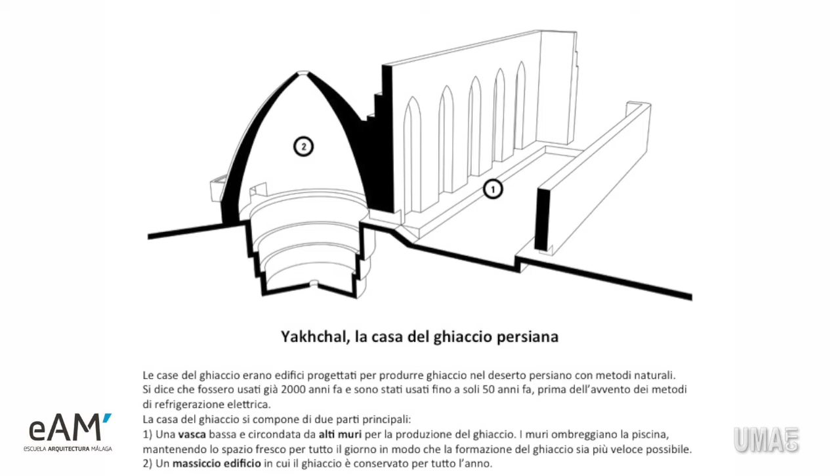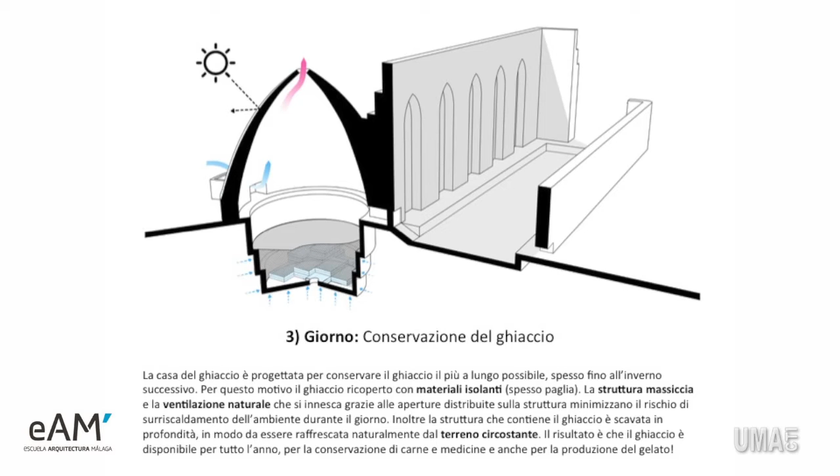Yakhchal is a house of ice. In many countries there was this idea of conservation of water, conservation of ice. They built a big wall looking south, and the wall protected a little pool behind it. In front of the wall there was a big tank with a dome. What the Persian people did was put water in this pool at night. During the day, the pool was under shade because the solar angle in winter is lower. Because the sky is minus 50-55 degrees, due to the radiation effect of the sky, the water froze at night. Every night in winter, Persian people were able to make layers of ice, then put the ice in the tank, cover it with straw, and conserve this ice all summer. So the people lived in a very extreme climate.

They were able to make this called faloodeh. It's an ice cream with tamarind and pistachio in the middle of the desert. If you read the story, Persian people were able to make ice 400 years before Christ. So it's a long, long tradition.

And this tradition I like to call empiric innovation. They try for centuries to make things until they find a solution, without any technology, only with the empirical. I try, and I'm doing, and try. So for me, this is beautiful.

I'm not nostalgic of the past, of course. I'm looking for the future, to make more buildings and new innovation. But I think sometimes it's also important to rebuild this bridge with the knowledge. Not that we want to make buildings as before, but the knowledge. We have 2,000 years of knowledge on how to deal with climate. We know, so I think it's a good time to use it again.

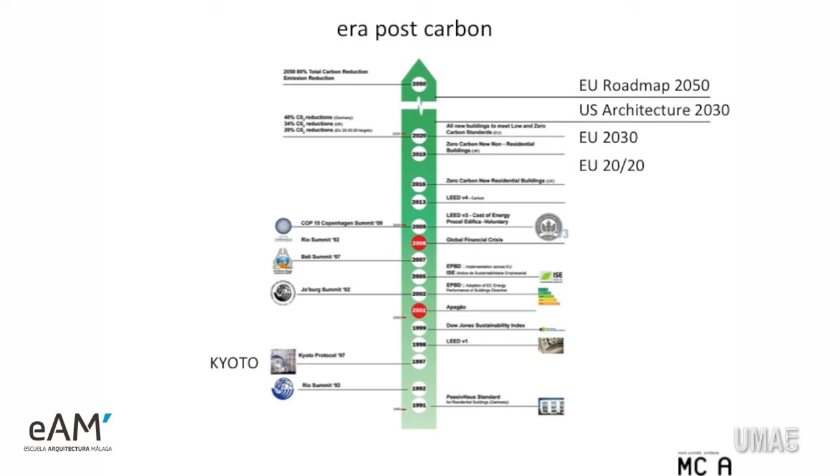As you know, 50% of all energy produced is consumed by buildings. So if we don't work on buildings, we're not going to solve the problem. That's why I think architecture, architects, engineers, and this whole idea of sustainability in buildings is very important. It's a key solution for the future.

And that is the European 2030 framework for climate change. It's a very ambitious plan: minus 40% of CO2 emissions, 27% renewable energy, less consumption of energy. So all these things look...

How we can design buildings called NZEB, nearly zero energy buildings. How we can design this kind of building. There will be an obligation in 2019 for public buildings, and it should be compulsory for all the market in 2020. So this opens a scenario I think is completely different in terms of knowledge. Are our architects ready for this challenge?

That's the point, because this is not only a question of creativity. This is how you can match tools, knowledge, and creativity. So this will be not an easy task in such a short time. But of course, it's not only a CO2 problem - that would be too easy.

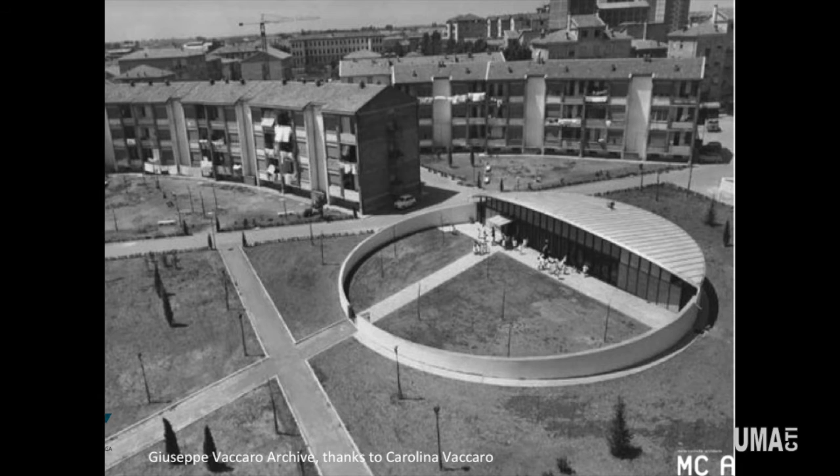I fully remember this wall, which was small and embraced the children, creating a protecting space. Then there were two small classrooms with a lot of daylighting, and I still remember the day when there was too much light coming in. It was designed by a modernist architect from Bologna, well known in Rome and Naples - Giuseppe Vaccaro - who was a very young architect at that time.

This was in 1960. He designed this building in 1957, and I was in this kindergarten in 1964. So it came back in my memory, showing that buildings don't move, but they travel in the memory. They become part of your story, part of your life, part of your emotion.

Especially for schools it's very important, because in the first 3 or 4 years children start to understand the world. If you design a building where they have a relationship with it, you can create a memory. So maybe I like to think that I'm an architect because I was in a very good and nice kindergarten.

So we designed this building based on the story of Pinocchio - I think you say that in Spanish too. Pinocchio is a very dramatic story, not really funny, actually very sad. I kept this picture - I was very interested in it, reading the book. If you know the story, Pinocchio was eaten by the whale, and he and his father were lost inside it - it took them two years to find each other.

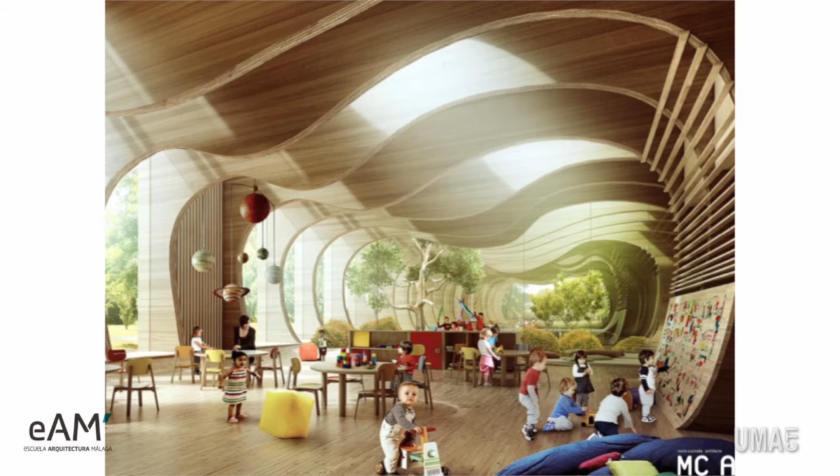If you read the piece of literature, it was fantastic. I thought, yes, this is a dramatic picture, but at the same time it looked like the womb of a mother - like being inside a belly. From this idea came our first sketches, and then we built this, which is a full wood construction building.

It's built with two materials, wood and transparent glass, and was designed in layers, one after the other, full transparent. There's no walls between classrooms, only transparent glass.

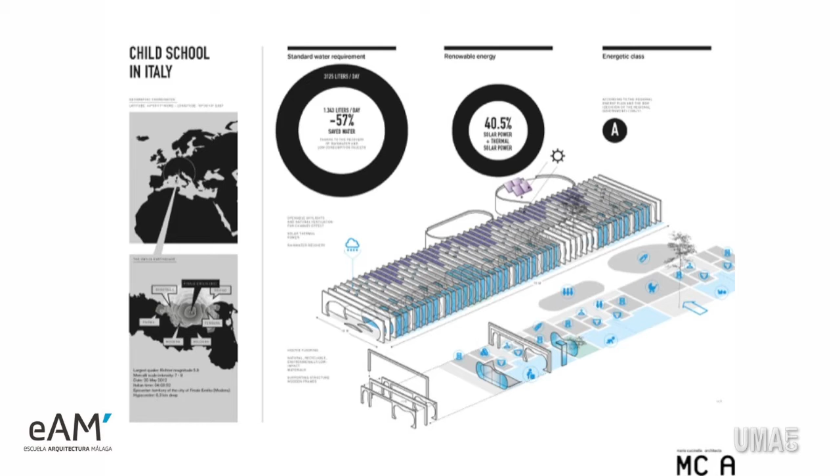Of course, it is made on the plain of Po, in the plain of Italy, between Turin and Venice. Nothing happens there, it's like a flat sea. The only things that happen are trees, very regular, and some little towers from churches. So the idea of this building was to find again this landscape of repetitive elements, very simple, something that you have in your eyes.

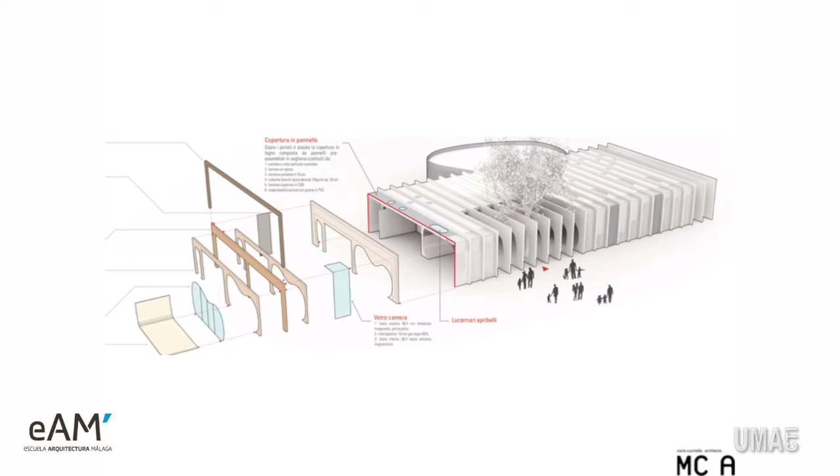And done technically by a system very simple, building this element in wood. 70% of the building is opaque and very well insulated, facing south. It's simple, also heating on the floors and a little ventilation.

Recuperation of the rainwaters, producing heating for the buildings, solar photovoltaics for the electricity. All these things are invisible. You don't see that. I think it was a little mistake in recent years to use photovoltaics as an expression.

Because photovoltaics is a very terrible piece, it looks terrible. And solar panels look like a washing machine. It's terrible putting that in the buildings. I don't think that's an aesthetic of sustainability. I like the building to be sustainable, but I don't like using that as the aesthetic of sustainability. So everything is invisible.

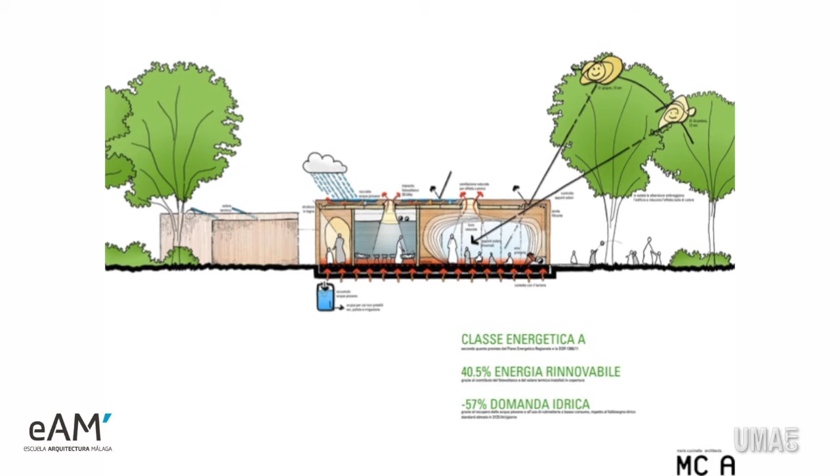What I like is the space. And of course, this diagram, which is very simple, is part of the pedagogic program of the school, teaching the kids these things, very simple. The sun is not only light but energy, the water is not only something that you can use, but you can do something else with it. So I think that's why I'm saying buildings are really the first level of education.

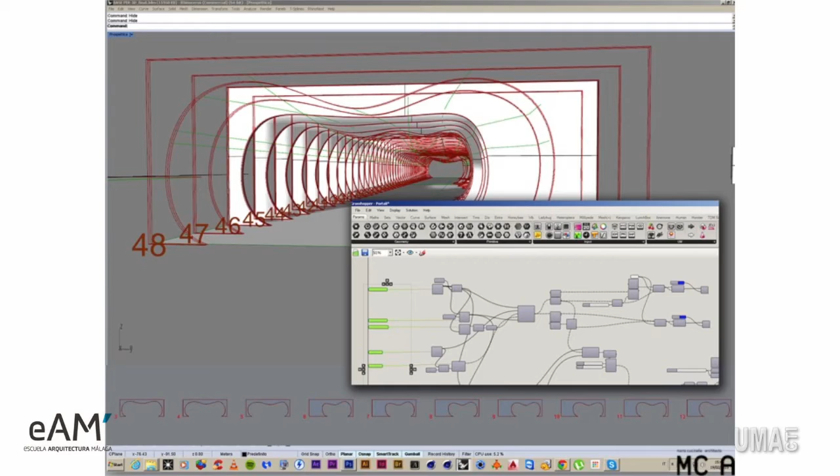We also used parametric design, and I think for us it was a very good experience designing this — in Italian it would be 'portali,' these are like doors. We sent our drawings directly to the machine at the Rubner company factory, and they cut all the pieces from the office to the machine. There's nothing in the middle. I think all these ideas of parametric design and new tools have made our life a little bit easier.

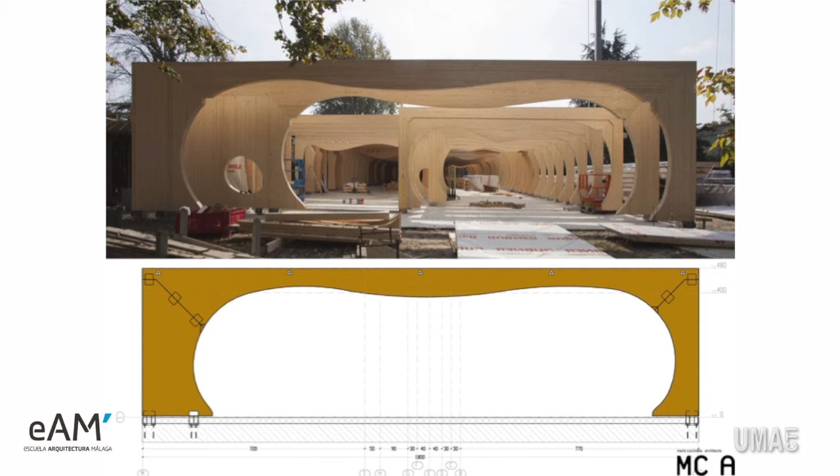And then they built 25 of these every week. In 4 weeks, all the building was up, and it took 6 months to finish. And of course, it looks like this kind of construction.

It was very important to go fast because kids need to go to school after the earthquake — if you have kids, they like the rhythm of life. If you change something in their life, it's something strange for them. So we started this project in October and finished in summertime, and next September they all went to the school. It was an event, very important for the community, and there was a long discussion with the teachers, because I always say we design schools for the others, not only for ourselves.

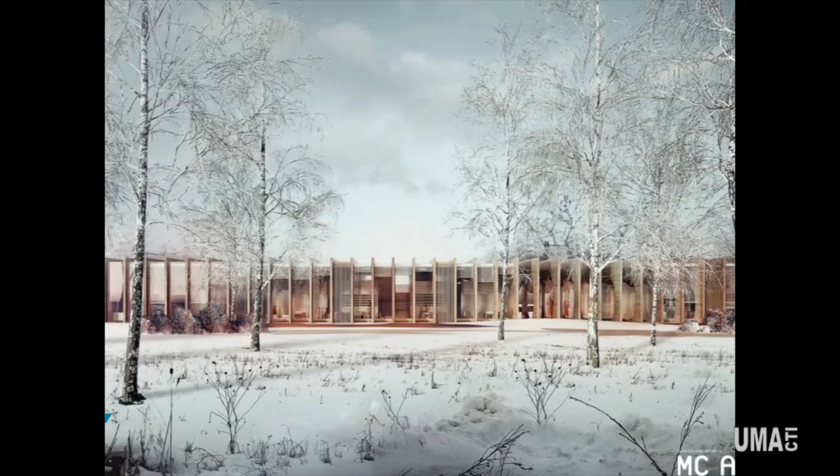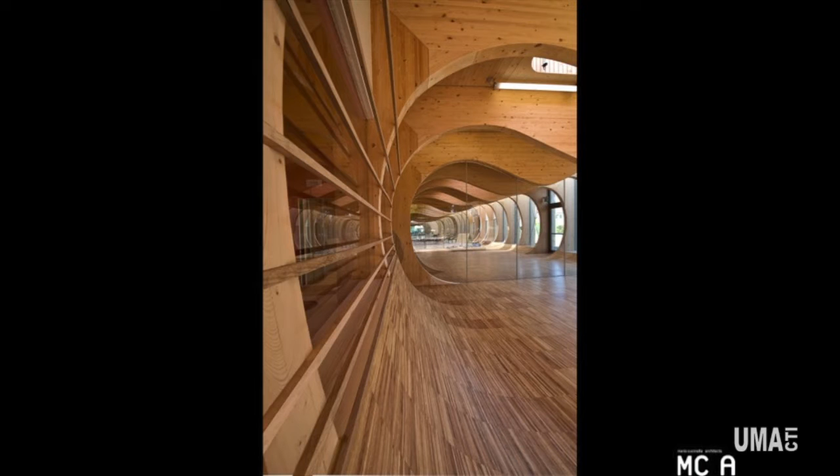And these are the pictures of the building finished. We discovered that the kids started to play with these floors, because it looks like they can play with toys and things — it was funny.

This is the laboratory, and there was teamwork with teachers and parents, because school, especially in our countries, the whole family is really attached to it — you leave your kids at school and then collect them after 8 or 10 hours.

So one point was very clear: 100% security in terms of earthquakes, and 100% security in environmental terms regarding material. Because kids touch everything, but they also lick everything, so you have to be careful about the material for them.

And then we worked with a group — we created a group of young architects called Laboratorio di Architettura Partecipata, and worked with students, families, and teachers through a series of workshops. I think it was also a way to bring the building together — when it arrived, it was already shared with everybody. I think that makes things much easier.

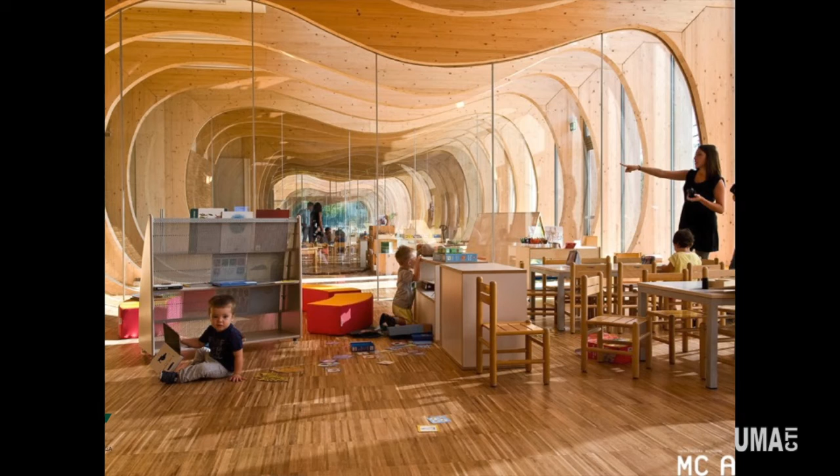And this is the project we did for ARPA, which is the Agency for the Protection and Prevention of the Environment. It's a public building, this one.

The story of this building is very long. I'm not sure if things work like this in Spain, but in Italy I won that competition in 2006, and I maybe finished this building this summer. So it took me 10 years to do it, because it was complicated and difficult, and the companies failed, so there were really complicated things. I always say in Italy, if I make one building every 10 years, and I have another 2 buildings, then my career is finished.

It's not like daylighting. Ventilation and how the air moves, all these things are complicated, so we need the tools. But for centuries they were able to ventilate whole buildings made of mud, cooling the building at night and getting back the energy collected at night during the day, reducing the temperature of the building during summertime by 8 to 10 degrees. So that knowledge is interesting.

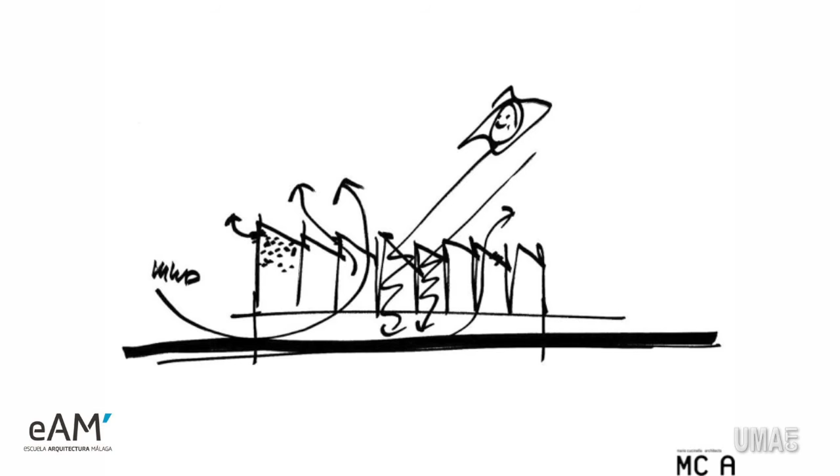When I did this project, it started with some consideration about the climate. We are close to Bologna, in a very humid and hot climate in the summer, and very humid and cold in the wintertime. So not exactly the best place in the world.

What we did is create this roof with 120 chimneys. They bring light through the building, so the whole building is in natural light, and at the same time the chimneys work with a chimney effect for ventilating the buildings.

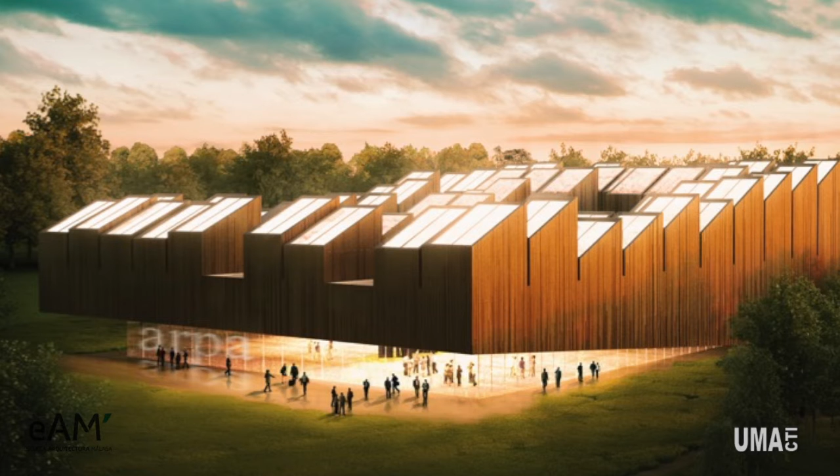So that is the diagram, showing all the chimneys and the two strategies. That's the building, all in wood construction - it takes a lot of time to design, but in reality this is a building you can build in maybe less than a year, if you want to do it quickly. And that is the passive strategies.

Of course, as a public building in Italy, you cannot do a public building only with passive strategies. You need to make all the technical services and everything. But interestingly, in the wintertime, the chimney works like a glasshouse, collecting the warm air on top, and with fans we mix the air. In the summertime it works the other way around, so when it's too hot, the chimney is opened at the back, and the chimney effect sucks air from the garden and ventilates the building.

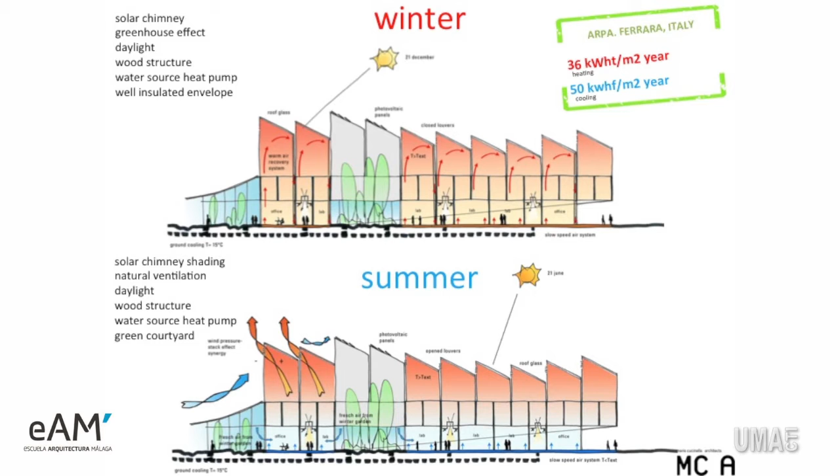Of course, that's not enough. When there's 38 degrees and 90% humidity, you don't want to open the windows, you want to keep everything out. So that works mainly in the middle season, or at the beginning of winter or the beginning of summertime. But already by the form of the building you're creating performance.

I like this connection between form and performance. And of course there are tools of analysis - this is something we do in the office. We don't do all the detail, we work with engineers, of course, but part of the office dedicates time to environmental analysis.

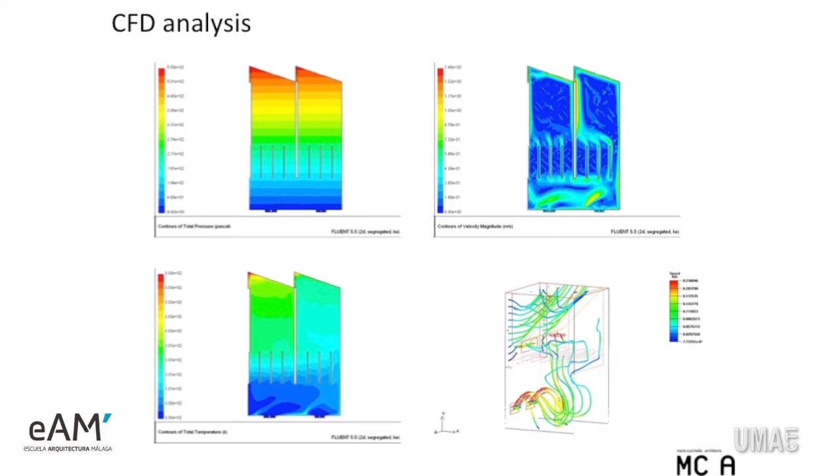So there are 2 architects who come from a PhD in sustainable design, and they do preliminary analysis on our buildings. I think it was very important for us, starting at the preliminary stage with architects dealing with this analysis. This is CFD, but we also do simplified analysis on daylighting and energy performance. So it's the beginning, but then we work, of course, with engineering, with companies, and on detailing.

But I like it when we're starting, because mistakes are made in the beginning. How you design a building - the first thing you do, if it's wrong, it's wrong. Then you can add technology, you can do something, but when it's wrong, it's wrong. So nothing - technology may solve 50% of your problems, but no more than that. That's why we work at the beginning to make some analysis to adjust the buildings, and then, of course, since we are not engineers, we work with them.

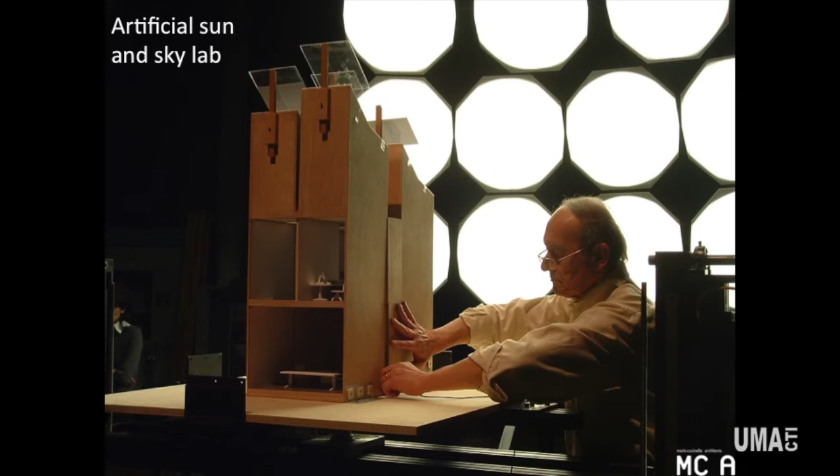That's the model in our workshop. We still do something analogic. I'm not a digital native - I'm coming from the analogic era. We do this artificial sky where you analyze the quality and quantity of light inside a model. It's interesting because it's a learning process, you're learning by doing.

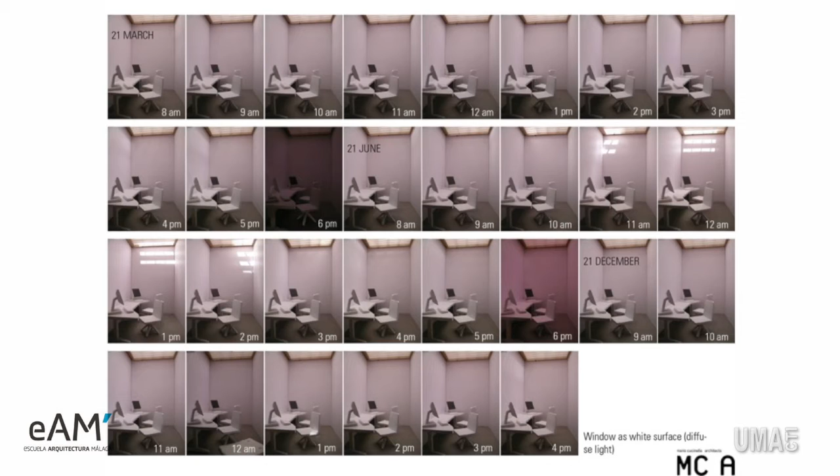This is in Turin, and you can analyze every hour of every day. In this case, March, June and December - high sun, middle sun, and low sun - and see what happens in the room. This is important for the office too, because young architects do this in the laboratory, trying to see how much the intensity of light changes when the light comes in. Of course you can do that digitally, but I think it's still important for us to do things by hand.

You can also use a radiance program to see the intensity of light and the exposure in your office. That was done because of another project, another competition in France. The government said they wanted a quantity of lux as a medium in the office for all years - 400 lux of natural light. So with that kind of brief, you need to really work hard on tools to understand how you can achieve it.

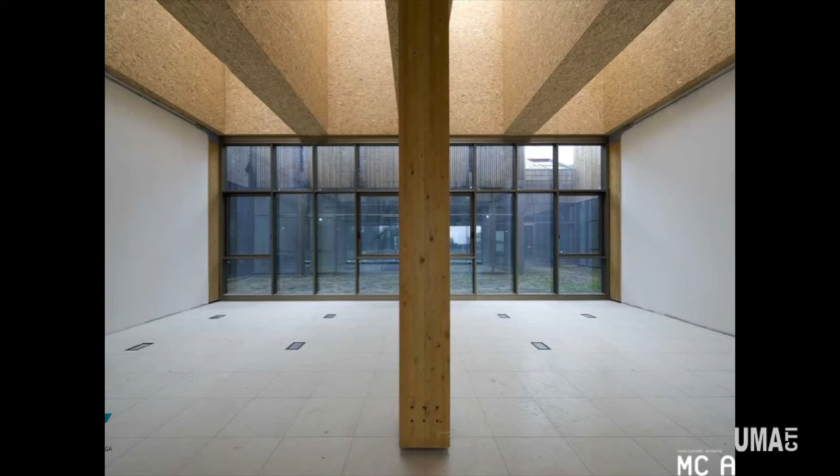This is almost finished - this is the roof, the technical service for the laboratory, and corridors, and this is the exterior, all this chimney. Interesting enough, at this stage, which is almost finished, the light inside is much more than the light outside, because the chimney reflects the light, so it's a kind of very stable and volumetric light.

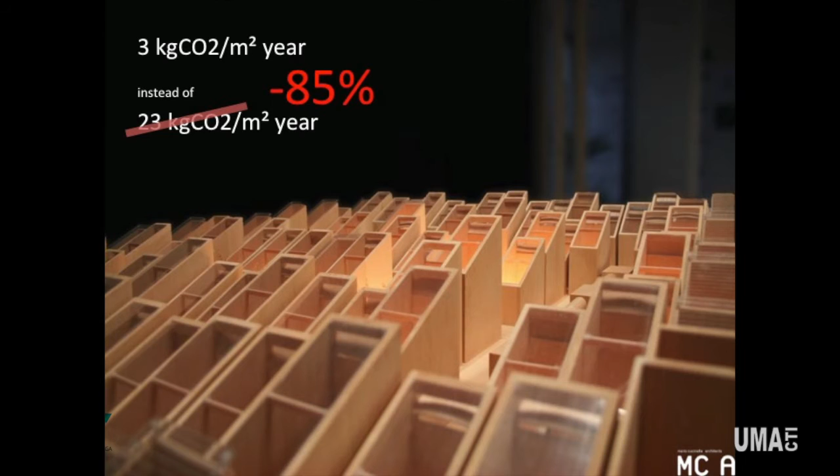That's the chimney. And these are the results in terms of CO2 emissions. So having the building's performance related to the shape of the building, you need less energy but also less machinery. It's the balance between what is passive and what is active, and I think this is the balance for what we define as sustainability. We need to reconnect the building with the climate, and use technology to reach that level of comfort, but not only by machine.

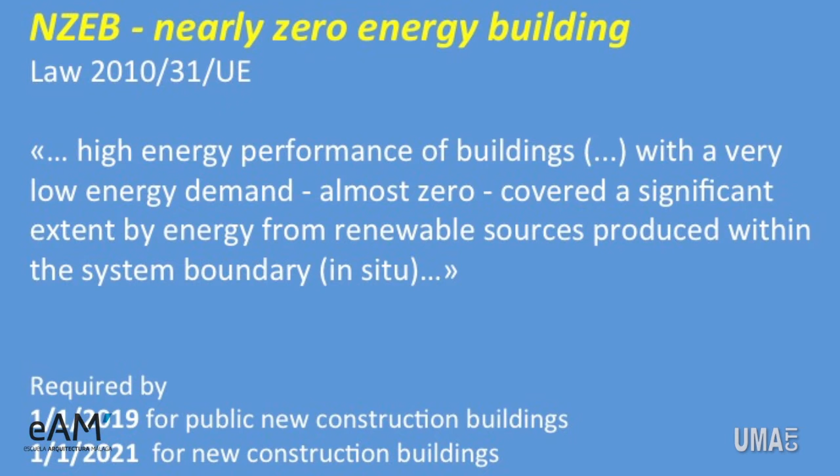Then we are on site with this building in Aosta, close to the French border. It's the first building in Italy by this European definition of a nearly zero energy building - a high performance building with low energy demand, where the energy needed comes from renewable sources of different kinds. That's the balance. For us it was very difficult, because making a building with this condition is not easy - not easy to start and understand how these things work. You need a lot of preliminary analysis work.

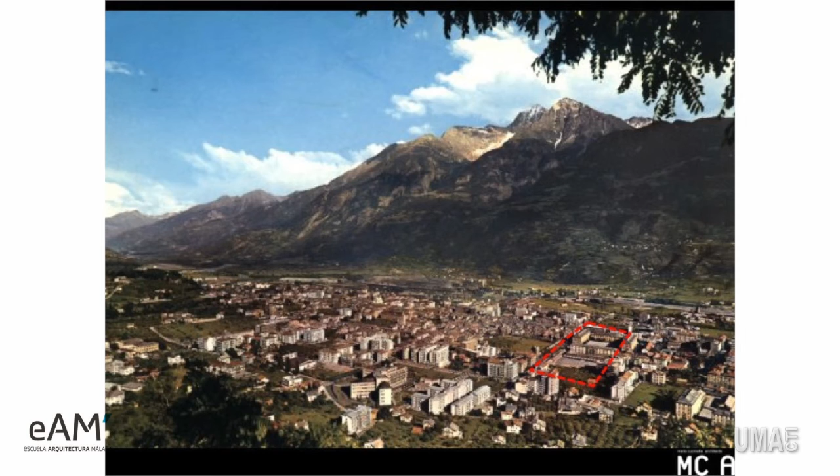It's also interesting - in Italy there's a discussion about reusing existing buildings. This is a military base, very close to the city center. Aosta is a Roman city, so this military camp is close to the Roman wall, and it's now being transformed into a university. It's happening in other cities in Italy too - the big military camp will be transformed for public functions: library, university, laboratory. This you can see from the other side is the vegetable garden of the city of Aosta, and that's also the Roman wall of the city.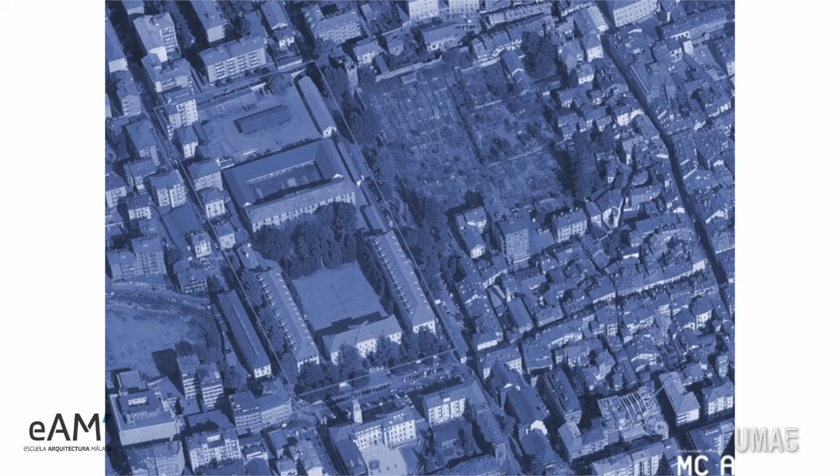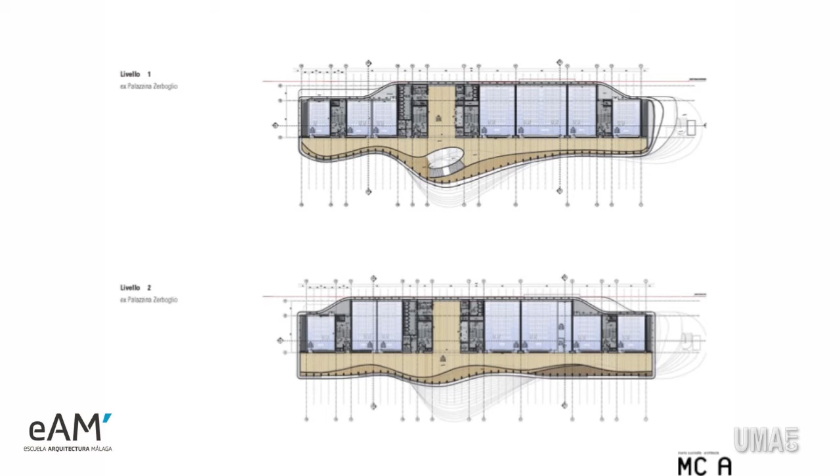This is the existing building, which is kept as a library, and this is a diagram of the two wings, the new wings of the university. That's the plan - we already started the site for one of these, and the square. We demolished two existing buildings and rebuilt two new wings for the humanistic university. It's like a piece of ice, a block of ice. The building itself is quite simple - a corridor, an atrium, and all the classrooms, which look east and west.

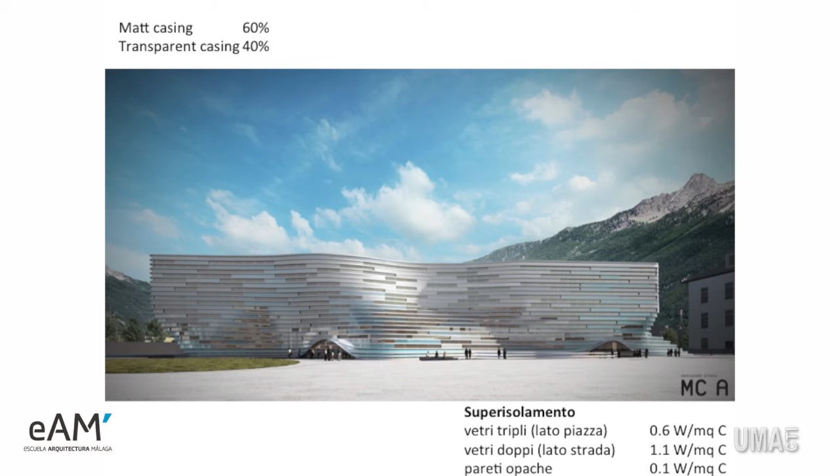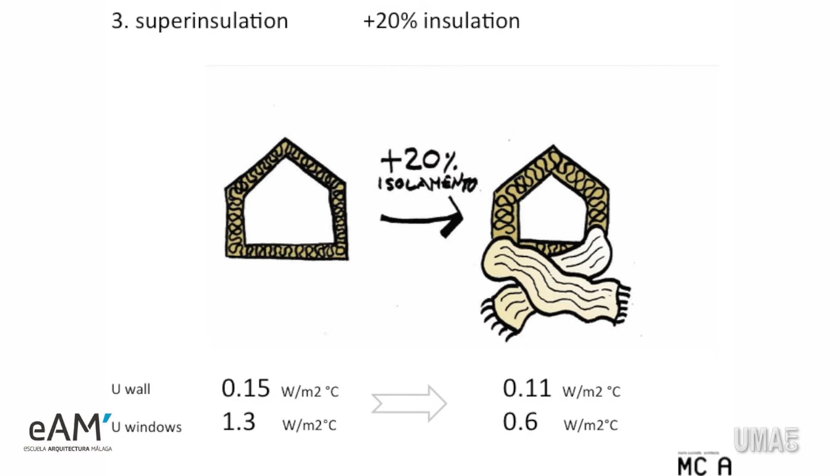And the buildings is 60% opaque and massive insulation, and 40% transparent. I think these two numbers are very important if you want high performance. If you want to make all transparent buildings with this regulation, you need to use triple glazing, which costs a fortune, or use again opacity, insulation, and transparency in a different balance. So more insulation, 20% more insulation in the buildings.

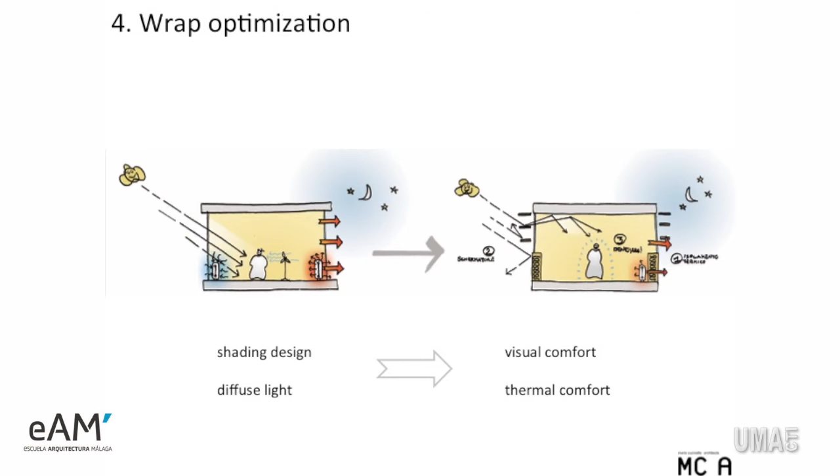Optimize the daylighting system and optimize the cooling and heating in the buildings. So this is the sketch, and we take the renewable energy from the groundwater, because Aosta was a city of very large steel industry, which has stopped. So the underground water has risen, so we're using cool water from the ground for the heat pump, and the roof is photovoltaics, and that covers completely the demand of energy of the buildings.

This is solar shading analysis, something we do ourselves. And also, as you know, especially for this kind of building, the innovation is, of course, in the buildings, in the way it's built, but part of the innovation is using the tools, how you can design a building with this shape in a way that you'll be able then to build.

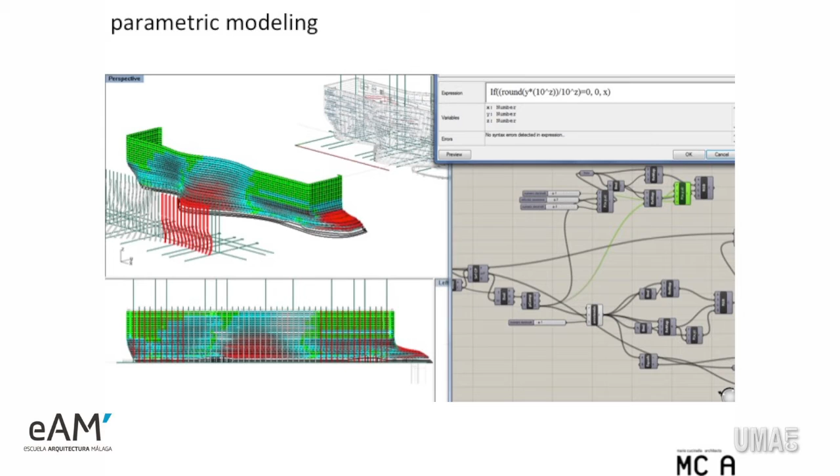So we're using Grasshopper for this project to optimize the shape of all the elements, and the idea of these layers of the buildings, very massive, compact, comes from this idea that these lines correspond to one night and one day. The night, the line is frozen, it's ice, and during the day it's snowy, and then frozen and snowy. That's why you have all these lines, and that is the way the building's made.

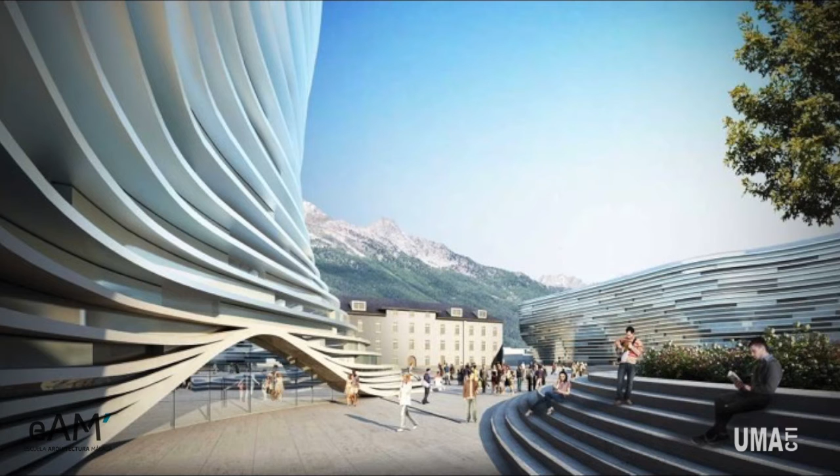We have a very large workshop in the office. We do a lot of modeling. So we're working with 3D, of course, but I still, I don't know, we make a lot of models in big scales.

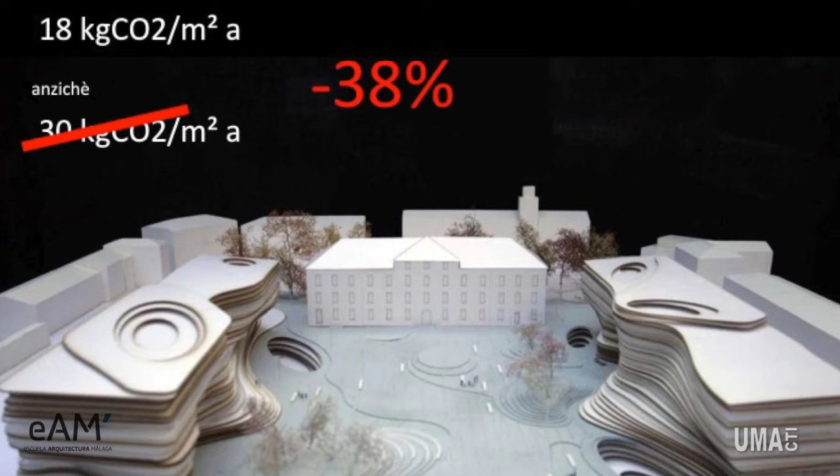So the reduction of CO2 emissions, and that's what will be. So we do now, this one is already out of ground, and the next one will be in the next 2 years. And that's this kind of model we do.

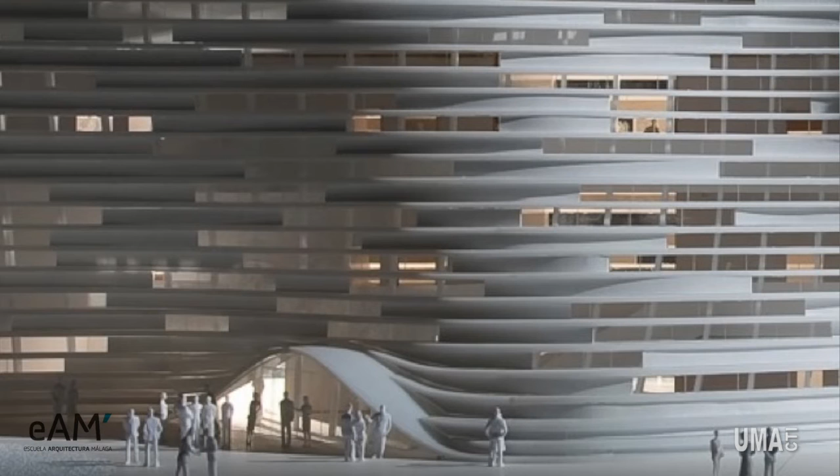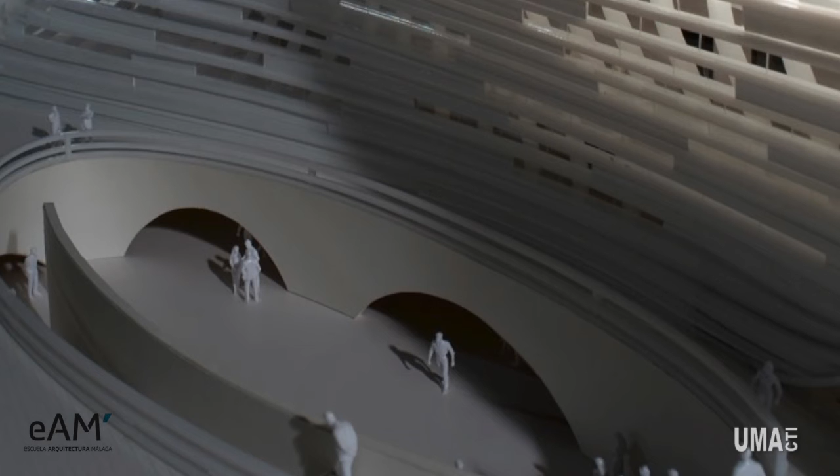You can see from this facade the opacity and the transparency. Of course, the problem is if you want to increase the opacity because it's more performant, then you reduce the daylighting. So you need to balance these two things. And that's the detail of these buildings.

And then 2 years ago we won that competition in Algeria, and it was a strange competition because we do competitions in any place, but in Algeria we pushed to say, well, we want to try to make a more efficient building. Algeria is a country of the biggest production of gas and some oil also, so it looks like they don't need these things. But in reality, even a country with a lot of gas and oil, it's not easy transforming the gas and oil into energy. It's not so simple.

And especially in the last 10 years, the Algerian economy is booming, and they build a lot of buildings. The Algerian city is getting bigger and bigger, and it's a crazy place. It takes 4 hours driving from the airport to the city center. Traffic jam, impossible. It's pollution, very high level pollution. Buildings completely out of context. They need a huge amount of energy for cooling.

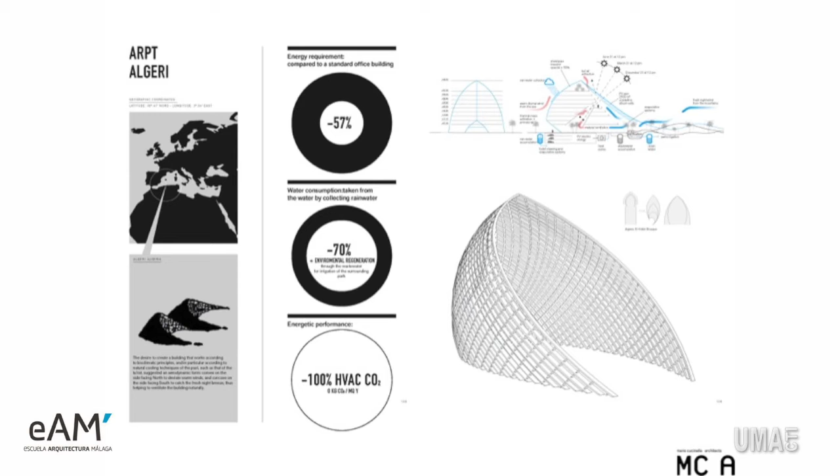So I think they're facing now, in some countries, if you make a wrong model for that climate, it will cost a huge amount of money, and then maybe you don't reach the level of comfort, and then you're also creating a problem for the environment. So these two things were part of the consideration of our project, and we proposed the idea to make like a dune, and then the building is actually this one.

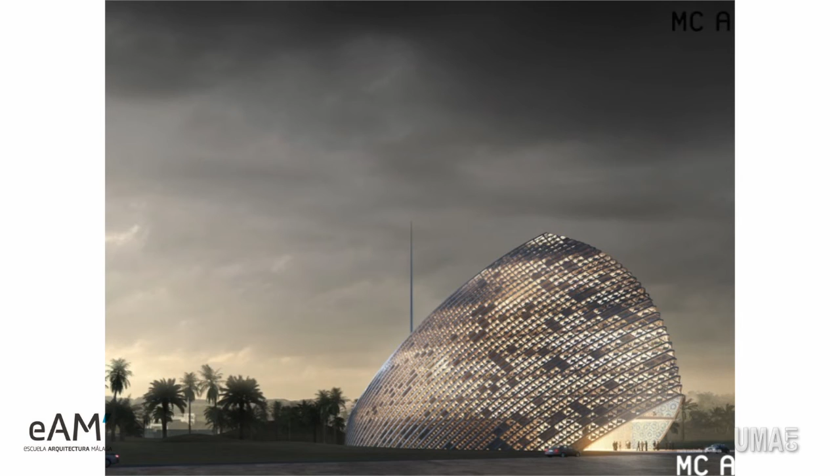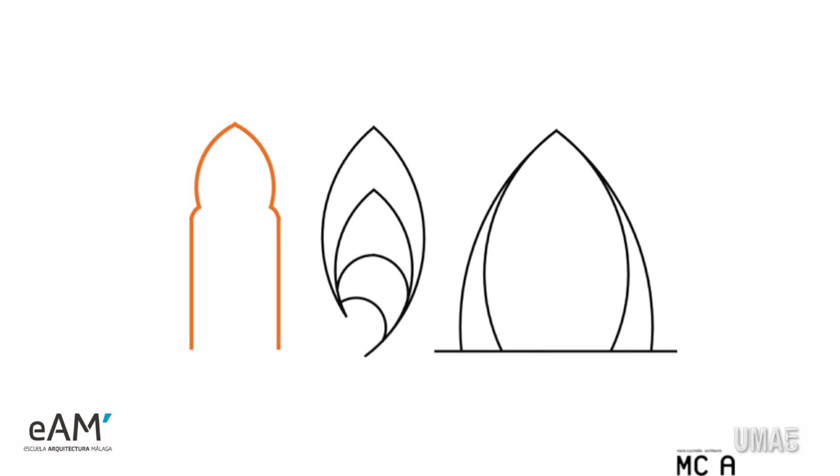It's like two semispheres connecting like a musharabi, like filtered light, and coming from the shape of the arch. And then these buildings consider two things. If you make a building looking south, in this case that was the plot of the land, we have one facade completely south, but the problem is not really the south, it's the east and west facade.

Because especially in the summertime, you have all the morning sun on the east side, and you have all the evening sun in your buildings, and especially in the wintertime when the angle is lower, then the temperature may not be very high, but you have the sun very powerful coming through the buildings, and you need to cool the building in the winter. That is the problem. So the idea is this sort of musharabi is filtered light, and the south face is a sort of canopy with photovoltaics, but it's open.

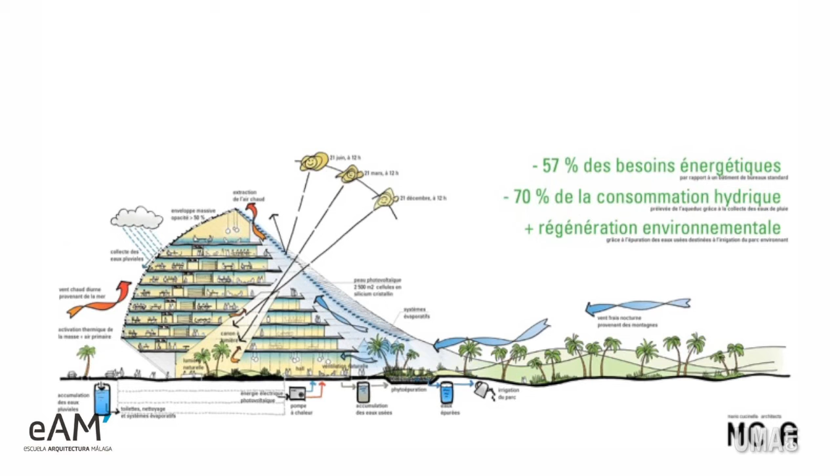So then we increase the ventilation on the south canopy to bring all the air to the top of the buildings. And that was the idea, the empathy. I say in the beginning, creative empathy was the idea of what we are working on, because empathy is, as you know, is the way you try to find relations with somebody else.

You're empathic with your partners. You're empathic with people. And to be empathic, you need to listen, and you need creating this relationship. In the context of buildings, empathic for me is getting information, understanding the place where you're working, and the creativity, of course, is a tool.

Very important. Sometimes it can be careful—we need to be careful because it can be extravagant. Creativity with no lines can be anything. So put the empathy with creativity together. Maybe you can use creativity in this direction.

So this is the scheme of the building. The roof, the south facade as a big canopy of the big atrium, so ventilating inside of the building on the south. We make this sort of eyes from the south to bring light in the middle of the building to the north side, and then the skin, the external skin.

So that's the map. This is a model just to show the elements. The yellow one is really where we try to bring the light from the south through the building, because it's very wide, especially on the ground floor.

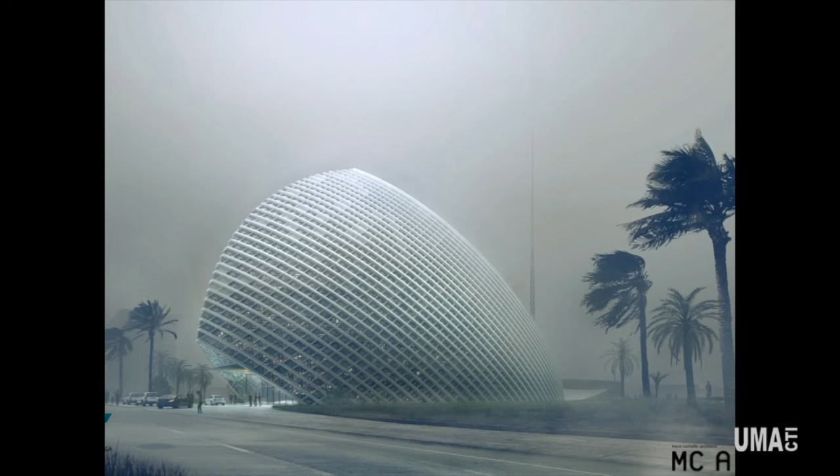And that is the picture of what will be. So we are now finalized. Italy is complicated—I'm not sure Spain is so complicated like Italy, but Algeria is very complicated. So whenever I'm trying to be living in a complicated country, I think they make me.

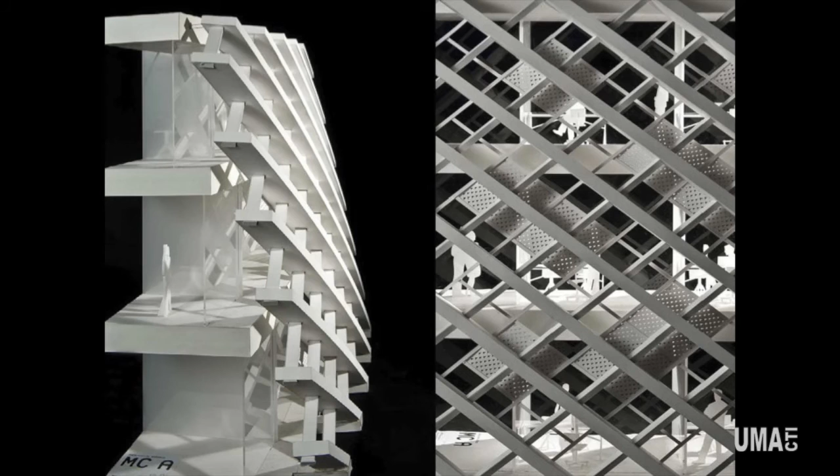Our passion is very, very tough. But we got planning permission after 2 years, and now we started the final drawings. And this is some study on the facade, because the facade is curved outside, but in reality inside the glass panels are vertical, making a sort of balcony on each floor, so it's easy to clean.

We are in an area where sometimes this kind of stormy sand comes from the desert and makes everything pink, the colors of the sand. So you need to be very careful about materials and the possibility of maintaining the buildings. The detail of this facade.

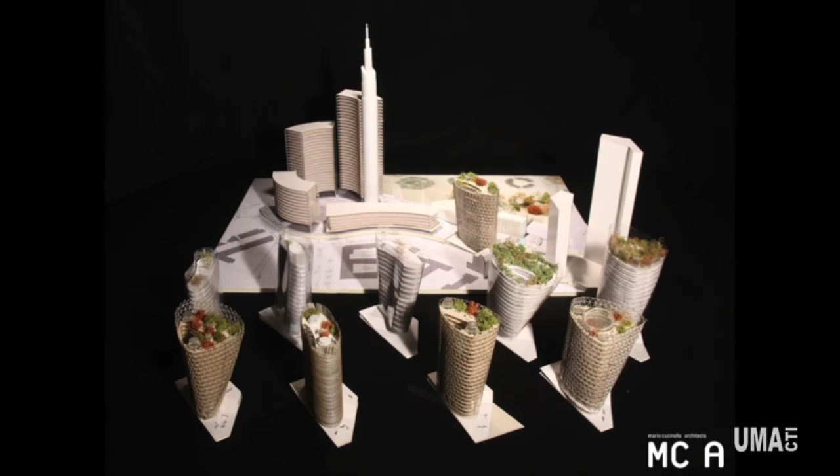And now this is our new adventure in Italy, in Milan. We made a competition last year, in summertime, and we won the competition to make a tower in Milan. I don't know if you know the latest news in Milan—they built in the center of Milan a sort of business district, but not like in other countries outside of the city center. This is really in the city center.

Cesar Pelli made this tower, the big one. And then the last bit of this development was this tower, and this is part of the study model we did for the project.

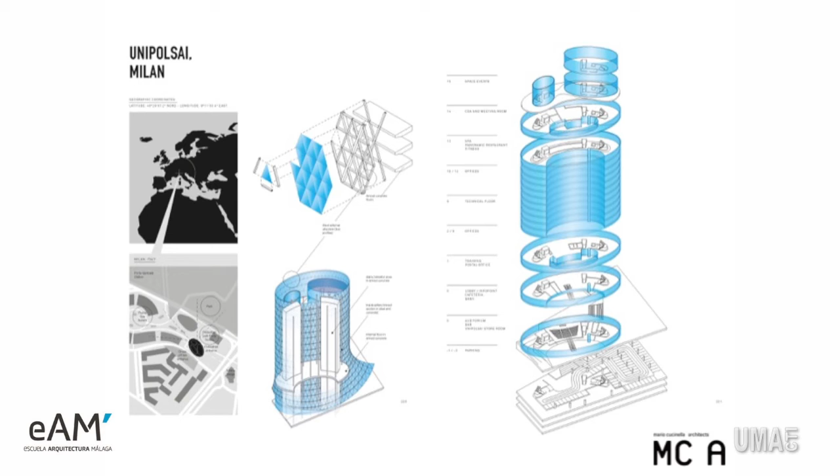And the project is about, just to give some aspect of methodology—the tower is the final building on this complex, and was designed with two considerations. One, the main facade will be on the south face, which is a problem. And what we did, we opened the south with a big atrium, so it's a 120 meter high atrium, then it's coming like a climate moderator from the buildings, and there were some urbanistic problems.

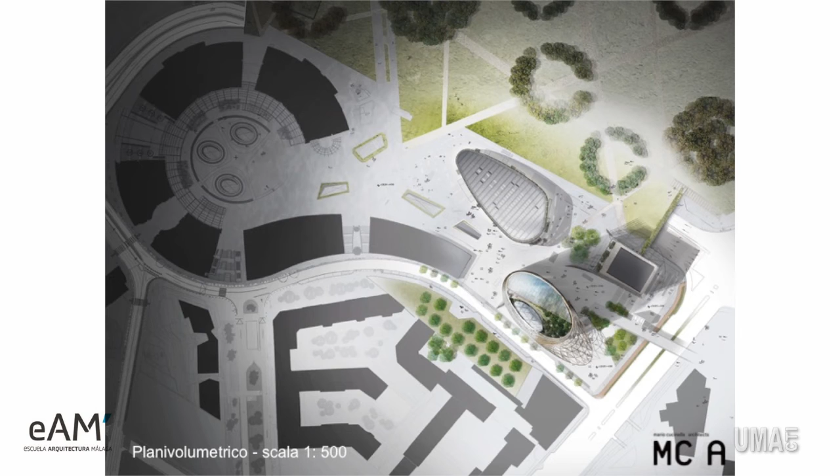So this is our building, this one, and that one. And it's a sort of diagrid. And the effort we do now is to do all the buildings in transparent glass, not painted, not tinted, very transparent. It's a double facade.

And you can see from the shape, all the south face is an atrium, is open—it's like a void. And on the east facade, the building is coming up, like the wind, creating a sort of effect of a skirt. The wind pushes the facade up and creates a canopy, and that should be one of the new piazzas in Milan on this district.

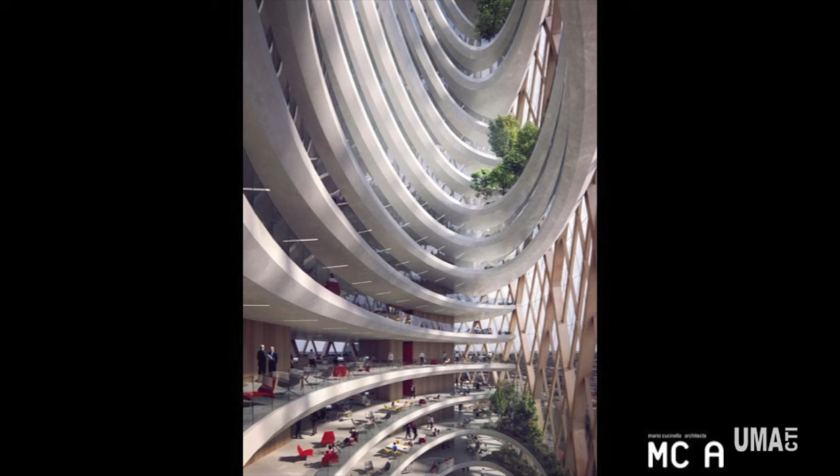And that is the atrium. So the idea is all this space is empty for all the floors, and it's interesting working with the engineer, the engineer Deerns from Copenhagen. The interesting thing is we call it a climatic moderator, because in summertime the temperature inside is no higher than outside, so we're using this as a ventilating atrium to bring all the heat from the office.

And in the wintertime there will be warm air inside of this atrium, and part of this warm air will be exhausted, but part of this air will be recuperated by the heating system, and we take this air from the atrium to heat the buildings.

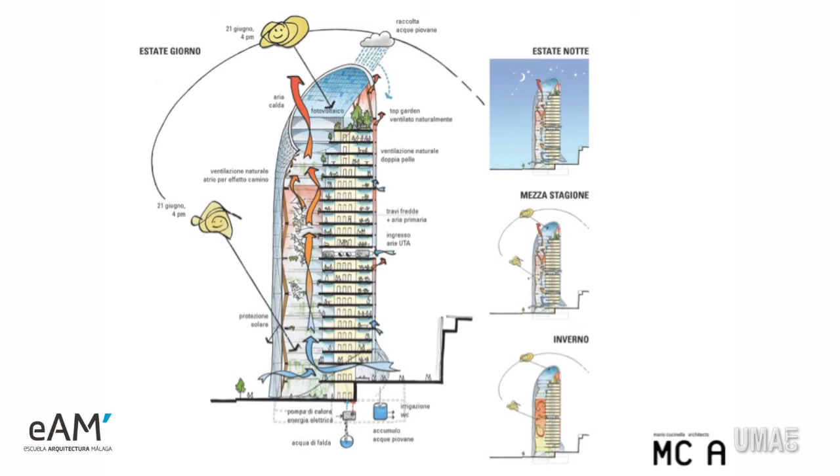So on the other hand, avoiding being very close to the facade on the south, we can have office very close to the edge. There will be a sort of internal panorama of the buildings, so that's the way it works, as a classic atrium, and from the top floor we collect this heating air and bring it inside the heating system of the buildings. And that's what will appear on the south face at night.

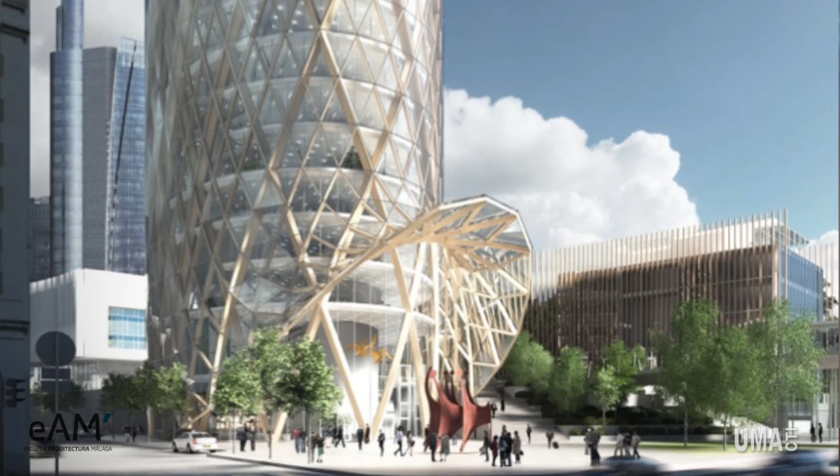So some sketches and some of these. I think what's very interesting about the Milan project is they made in some cities this business district, which is interesting. But I think in Milan it was very successful because they connected it with the existing city. We are not in a historical center, but close to the part of the city near the station. And the fact that we are creating piazzas, squares and connections makes this contemporary area very successful in terms of urban design. This is one of the piazzas, as I told you.

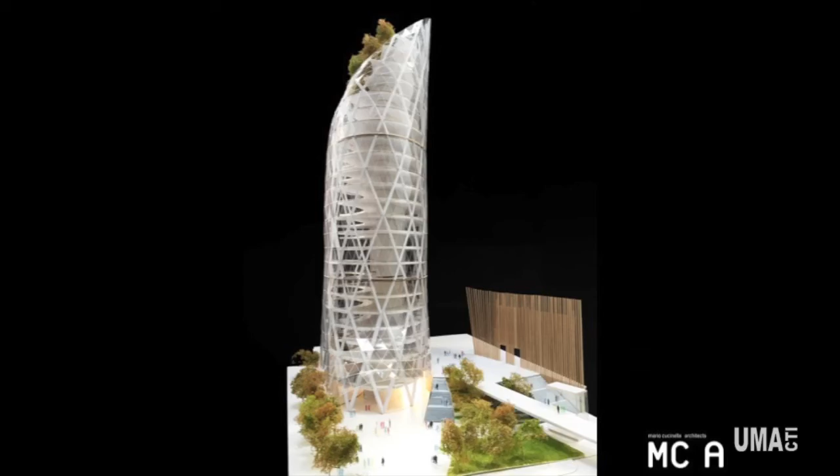This is a study model we made in the office to understand the towers and the atrium, the gardens, and the system of structures and the skin.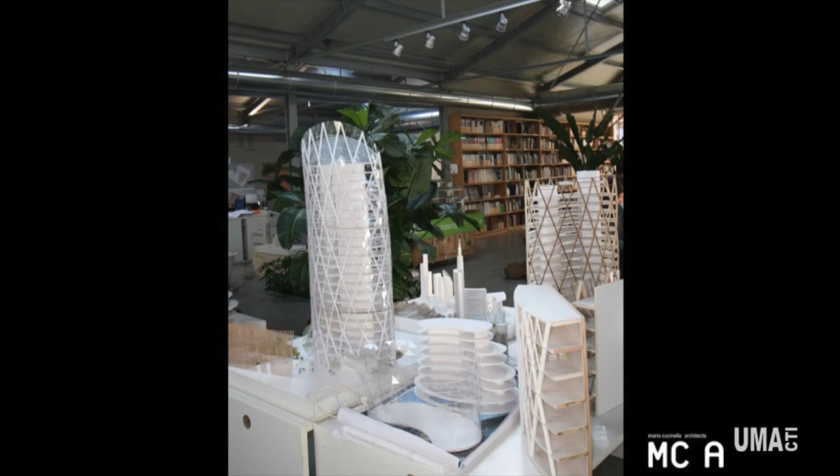This is the office, and I'll show you another project. See, 10 minutes. This is a project we finished in Ghana, Africa. We are in an almost tropical area, and this was the first model we made after the trip to Ghana.

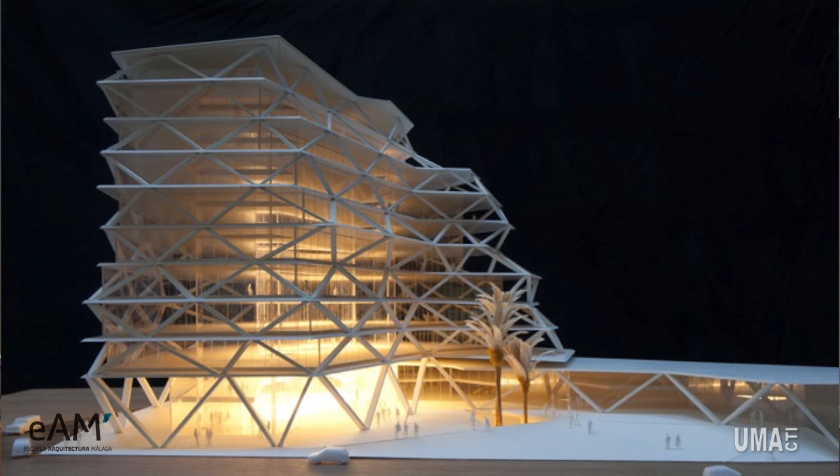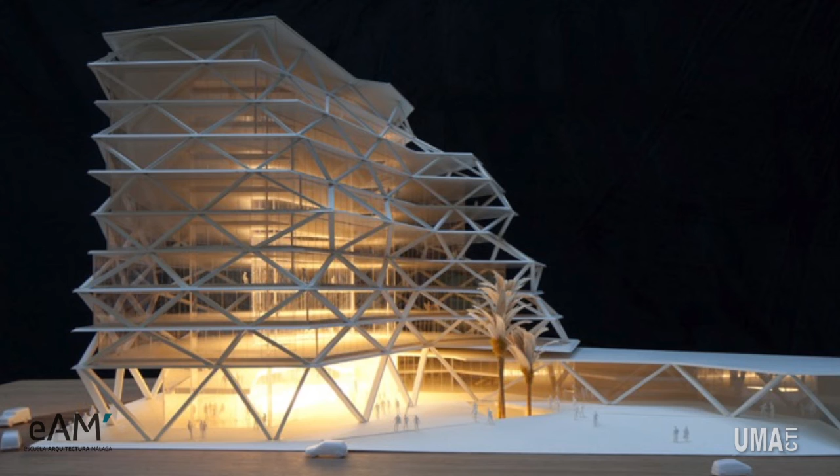There was one simple consideration. Ghana's solar path is very different from where I'm living. In Italy you have 78 degree angles maximum. In Ghana you have almost 90 degree angles, so the sun goes up very quickly in the morning, stays vertical all the time, and then drops very quickly in the evening. So the problem here, especially for the climate, is...

The temperature of the air is almost in a comfort zone, apart from specific periods of time, but it's between 23-25 degrees, so it's fine. The problem is the sun is too hot, but if you are under shade, you get all the benefit of the air temperature and not the heating from the sun. So if you make cantilevered floors and shading of your buildings, you reduce the energy demand by 50% just by making this choice, because all the glass is in the shade. There's no facade, there's no solar gain.

There are many things to say about the shape, but I was also interested—if you go in Ghana, you see everything is done by hand, buildings are done by hand as in many places. But here you can really see the work, and the beauty of many things comes from this imperfection. Sometimes beauty is really an imperfection. I thought, because it's complicated work in these countries, maybe if the floors are not exactly on the same line, if somebody makes a mistake, nobody sees that. But then it was very complicated to make things imperfect rather than perfect.

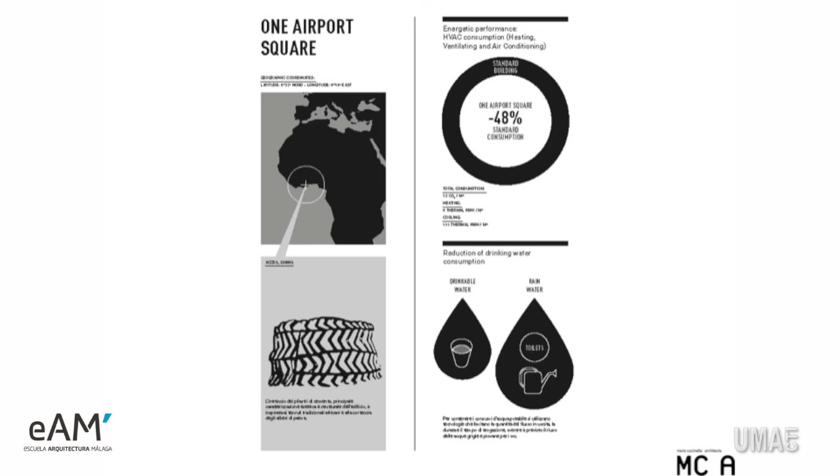And I'll show you the buildings. There are some reference pictures, some renderings, but then there's the solar part—you can see the diagram. So the sun is very high all the time, all season, and that's the passive cooling strategy.

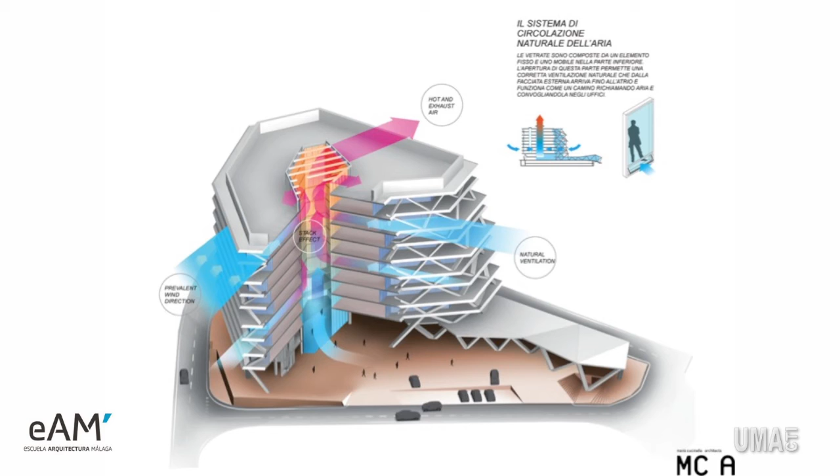If you're under shade, you still have a very good air comfort zone for a long period of time, and that's the principle. The building has floors shading all the terraces and an atrium where you can ventilate, because as used in many housing projects and buildings, especially last century, they used glass louvers, so you can moderate the louvers and increase ventilation. That was working perfectly, and that's what we did in the atrium—that's the strategy of solar shading.

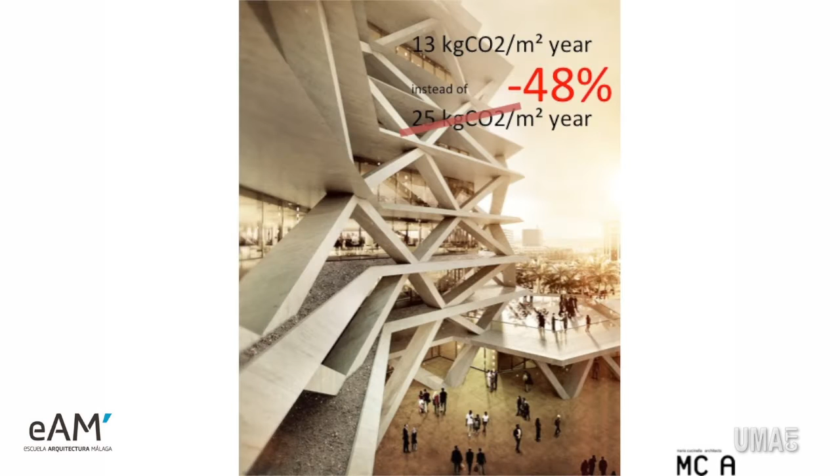Okay, and that's the buildings. You can see from these pictures the sun is not here, so you can see the shading. You can also use transparent glass with no performance rating, because they don't need relation to the performance of the glass.

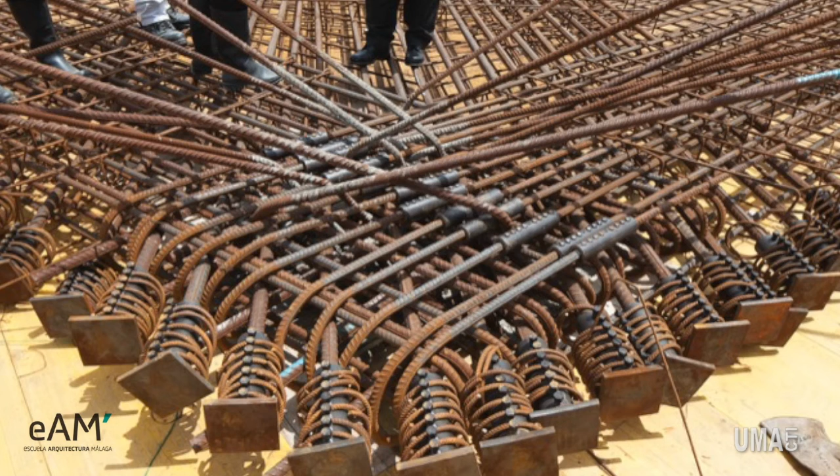The most important part of the work here was at the design stage, because the building was made very traditionally—everybody using concrete, everybody knows how to use steel to make concrete. That's the base almost everywhere in the world. Every company knows how to deal with these two things. So we did this. This is just a typical floor, because the columns push horizontally, so you need the floors as elements just to keep this force.

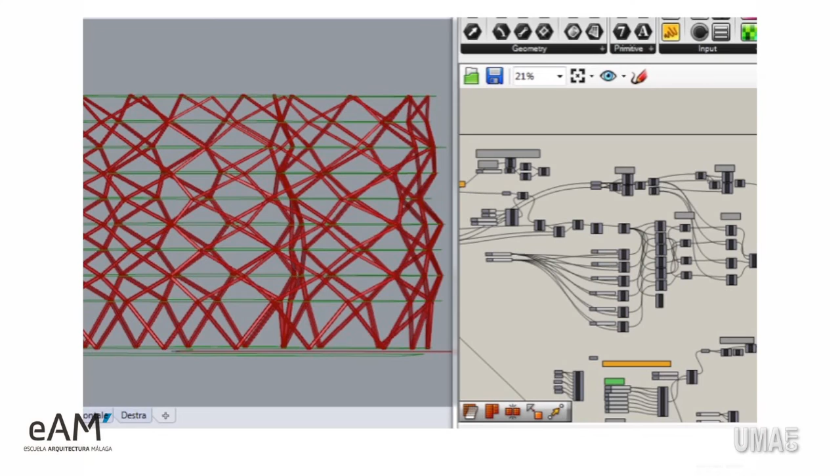From the beginning of our sketch, it was really complicated with all the different elements we were using. We optimized the families of the different elements, and in the end we were able to use only 6 different pillar lengths and 208 different nodes instead of 648. So this is the optimization achieved by using parametric design.

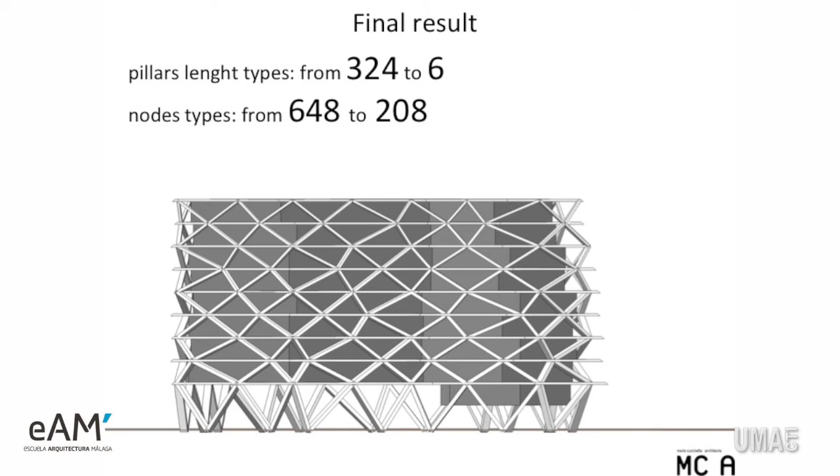And then all the work was mainly on the tools, because in terms of technology it was quite simple. It's the way we design and the way we prepare some of the elements to help make these buildings.

It was funny enough, because the traditional modern building in Ghana is pink, blue, or reflecting glass - that's the idea of contemporary architecture. So when we did this building, before putting the glass, people thought it was a parking lot, because there's no windows, no facade. Now I think it's become one of the landmarks of the city, because they understand there's a connection with the culture of the place.

There's Fernando Guerra's pictures, just to give you an idea.

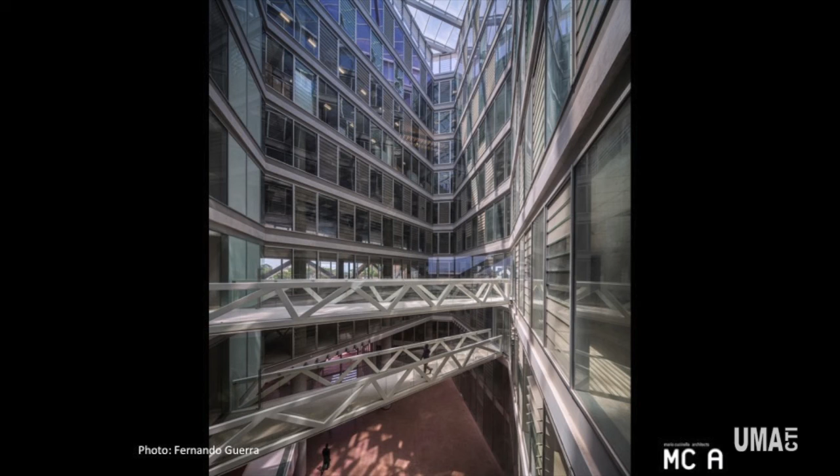And of course, the mass of the building is working as part of the comfort of the buildings. And then the atrium - you can see the atrium, there's panels fixed, full glass, and every panel has louvers. It's very simple. If you go in this place, you feel it - there's always a breeze, and it's just enough to open the windows and vents, and the office will be, for more than half of the time, free running.

But the interesting thing is, in Ghana, oil costs the same as here, and electricity costs the same, because producing electricity by oil costs the same. So having a building using mechanical ventilation only half the time is a big money saving. So whether the numbers are big or not, the fact that the building is reacting with the climate and trying to get the benefit from the climate, using technology as part of this, I think is a good thing to do.

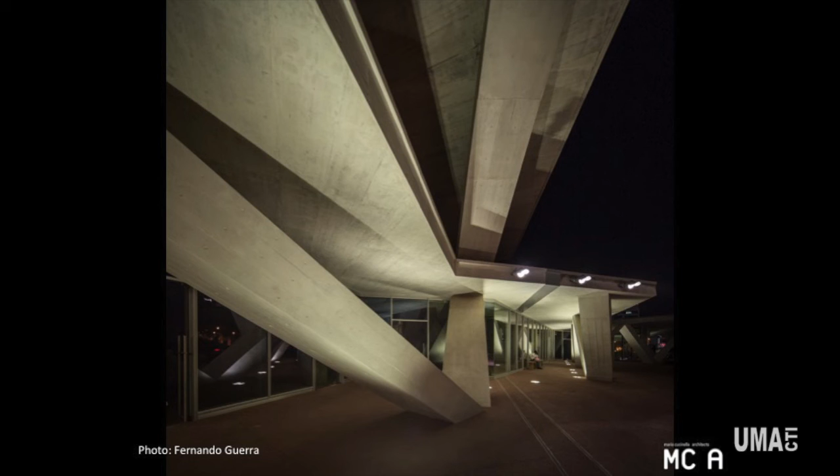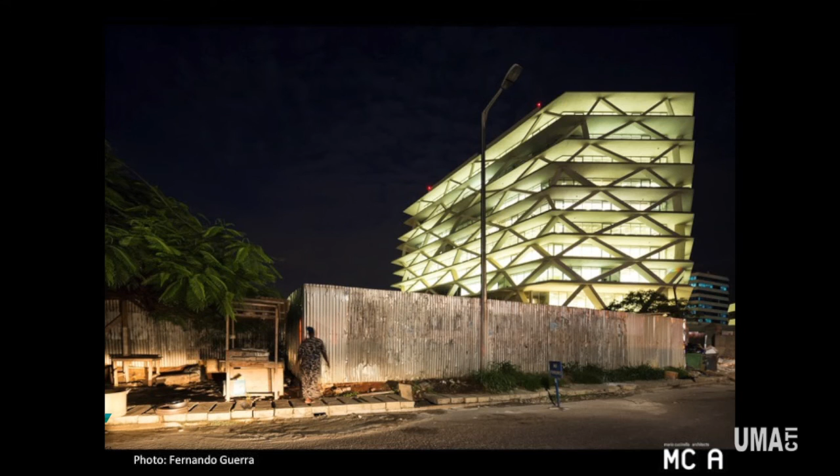This is the concrete, very brutalist. It looks like buildings in Brazil, the Brazilian buildings from the modernist time. It's very hard concrete. That's the context.

And then I want to tell you another story which is interesting, just to finish this presentation. It's a story about Galileo Galilei, the astronomer - and sorry for the Italians - it says 'qui è rinchiuso Eolo, re del vento.' Eolo is the king of the winds.

And the story starts - if you read the biography of Galileo Galilei, it's interesting because he was a funny guy, a party man. He went to a lot of parties, and he said he enjoyed going to this party in this villa. This is a villa in Vicenza - it's not Palladio, but it's in Palladio style, and Palladio was also one of the guests of this family.

He tells the story that one day there was a big party with a lot of food and drink, and it was too hot, so they tried to find a fresh place to stay. They discovered that on the first floor of the building there was a grid on the floor where fresh air was coming out. This happened because the villa was attached to a hill where there was a sort of cave. The air in this cave is more humid and fresh, and it drops down,

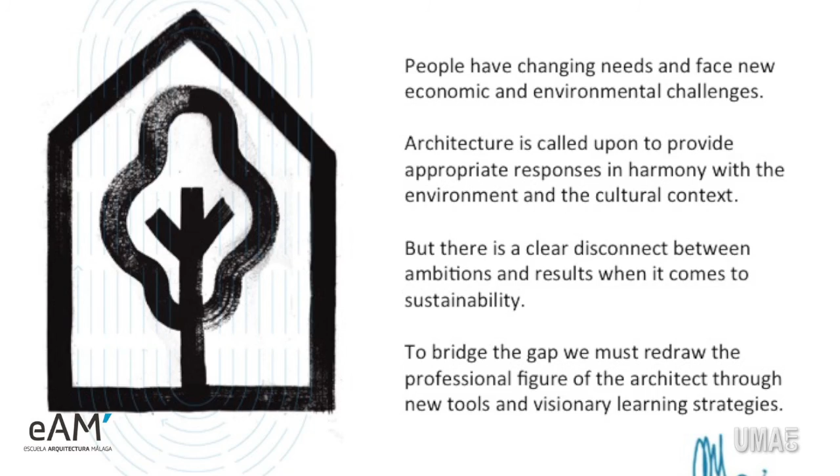This is oriented as a postgraduate program around two main pillars. One is the vision—why we need to work on this issue, why it's so important to work toward the vision of 2030 and get a more humanistic vision. And the other is tools, because we are architects.

So we made four courses: one called Architecture as a Social Business, related to urban regeneration. The other is Post-Carbon Architecture, how we design buildings in a post-carbon era. Right for a Shelter is about working on social housing. And Blue Design is about working with designers on design for ecology.

We started last year and have already completed two semesters. The idea is to give these young architects the opportunity to see the complexity of the problems. There are people coming to talk—climatologists, anthropologists, ecologists, different people—to give the widest possible understanding of sustainability and ecology problems.

On the other hand, we teach them office tools, like how to simulate internal performance, how to do daylighting analysis as an architect, not as an engineer. So we give them tools to understand design in sustainability.